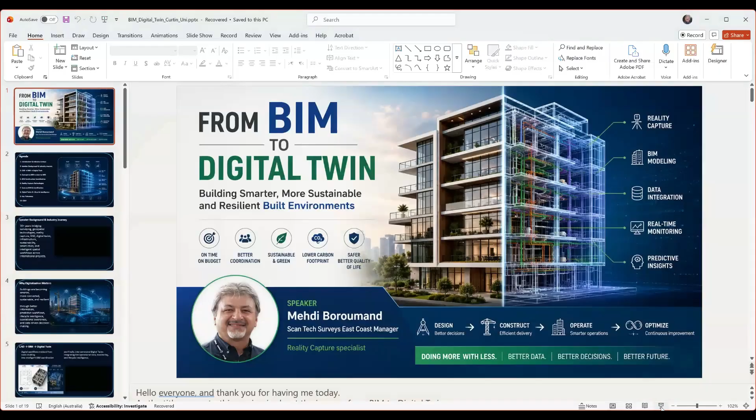Mehdi previously worked with Bentley Systems in digital twin and reality modelling across Australia and New Zealand, and currently leads reality capture initiatives with Scan-Tech Surveys in Melbourne. Today's session will explore how emerging workflows from scan to BIM to immersive virtual tours and digital twins are changing how we capture, interpret, design, and interact with architecture and space itself.

Thank you. Thanks, Alina. Thanks, Amin. Great voice. Thank you for your intro.

Can you hear me okay? Yes, all good, awesome. So yeah, this is really a privilege for me to be here presenting and sharing some of my thoughts around the topic, which is from BIM to digital twin. Thank you for the introduction, and thank you, Amin, for arranging and organizing this.

So I assume that the audience is mostly architects, students in architecture, and also some professors around. This is really a privilege. I need to learn more too - it's a learning curve for me to be in this space with architects sitting around. So I hope it's going to be more of an interactive session rather than a monologue. Feel free to stop me, interrupt me wherever it makes you have questions, and we'll make it more interactive.

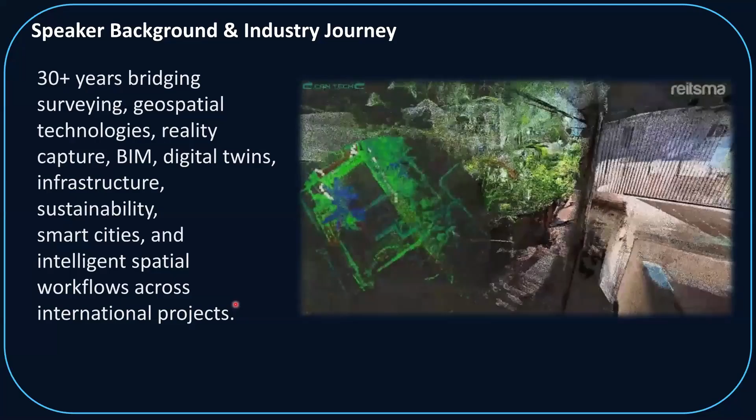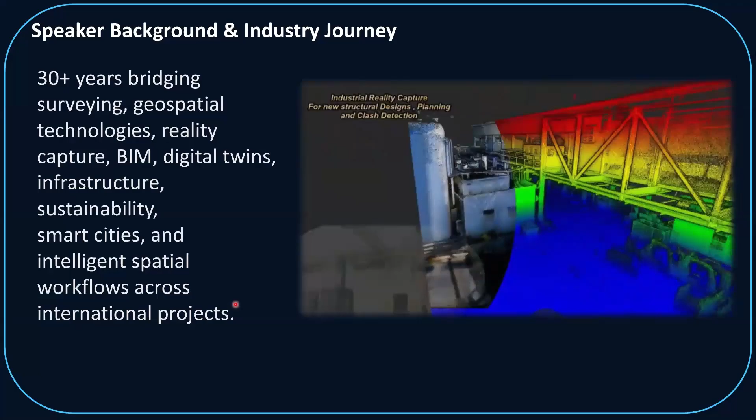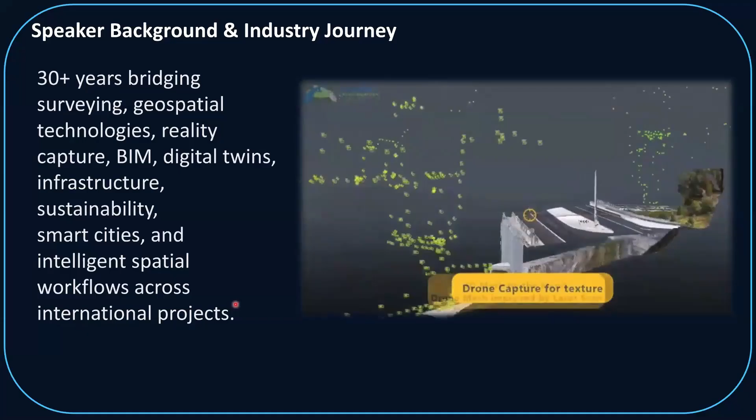So why does digitalization matter? Why is it important? It's not digitalization for the sake of digitalization, we don't do this just to create fancy material. The real value is that buildings and infrastructure are becoming smarter, more connected, more sustainable, more resilient. In the past, many decisions were made based on drawings, assumptions, site visits, very fragmented information, and there was friction in connecting them, so many hassles.

So today, with better digital workflows, we can make decisions. Sorry, let me close this window, a little bit noisy here.

With better digital workflows, we can make decisions based on clear information. So clarity over assumptions is really the value we are looking for. Some measurable reality, better coordination between teams across construction and operation of the live asset, many different teams, how to align them and be in a collaborative environment. This means saving time, reducing cost, improving quality, reducing waste, improving safety, and supporting sustainability. In simple words, digitalization is helping us do more with less. Because of labor shortages, this really makes sense in terms of how we can do more with less resources - less rework, less uncertainty, less wasted material, and better long-term outcomes. It's about how we can increase efficiency around the project lifecycle.

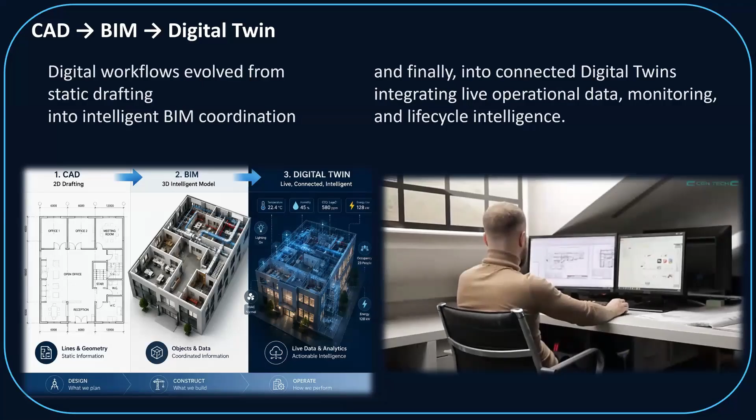A wall was no longer just two lines in a 2D map, it became an intelligent object - material with thickness, even vendor, supplier, all information connected to that specific wall, height, relationship to other elements. This information really started to shape BIM and its value. So BIM is not just 3D geometry that we simply convert from 2D to 3D in the CAD model. A 3D model without information is still just geometry, BIM combines geometry with data. Digital twin takes this one step further as the next tool, actually to live operational data that you need, like how to connect sensors and monitor the system.

And this is really shaping what we call life cycle intelligence, or project intelligence. BIM helps us design and coordinate, while digital twins help us monitor, operate, predict, and improve performance over time.

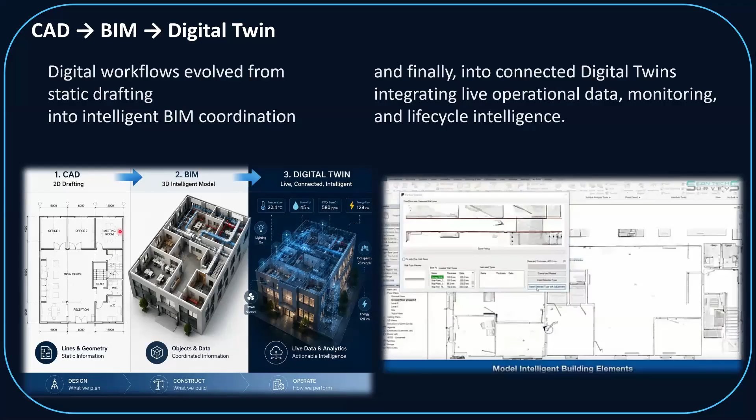Make sense? Yep. This is just a step level from 2D to 3D and BIM, and eventually the digital twin. I'll try to put this in the slides. So basically, we start from two points.

Either we have an existing building and want to do renovation, extend it, add another extension, reshape the facade, change the interior design, or change the use. For those cases, we're considering an existing building, infrastructure, or structure. This is where we need to know what's existing on the ground in reality. What we call an as-built map is really crucial here to have more clarity, rather than having assumptions and then making mistakes not aligned with the existing situation.

Or we start from scratch, from the concept, drafting on paper, sketching, and designing as the first step. So this part is split into the origin of the data that we're providing and feeding the system, and the rest merge together until we end up with the BIM model.

So in those cases, we do not start from imagination. We start from reality, the scan. We scan the building, capture the existing condition, and then create a BIM model based on what is actually there, rather than assuming or just guessing.

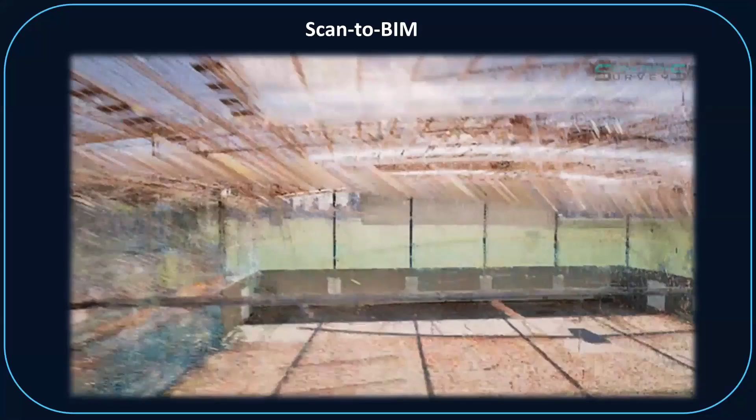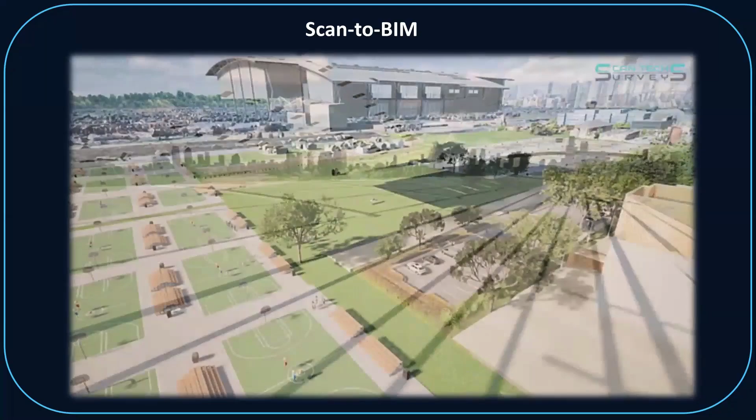Okay, yeah. So from this slide, I try to play some videos, a little bit more visual, pleasing content, because probably before it's getting boring for you, I try to please you more with a little bit of refreshment.

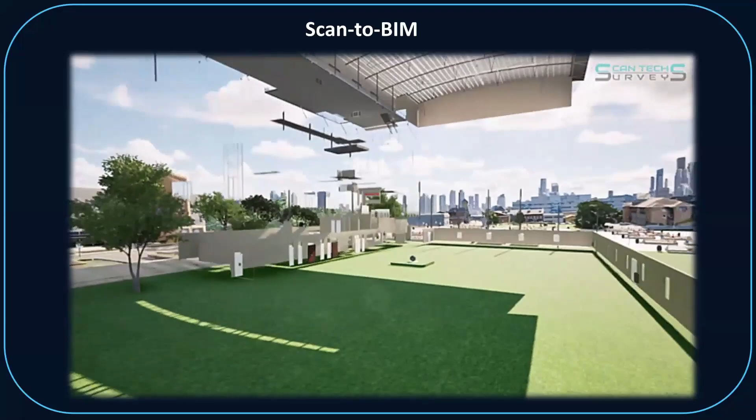So this is how Scan-to-BIM works in practice. This is one of my projects in Perth, where we scanned sports facilities. I put this together in Twin Motion. Perhaps you're already familiar with this Autodesk product, which is for visualization and animation. This is the point cloud I got from different projects.

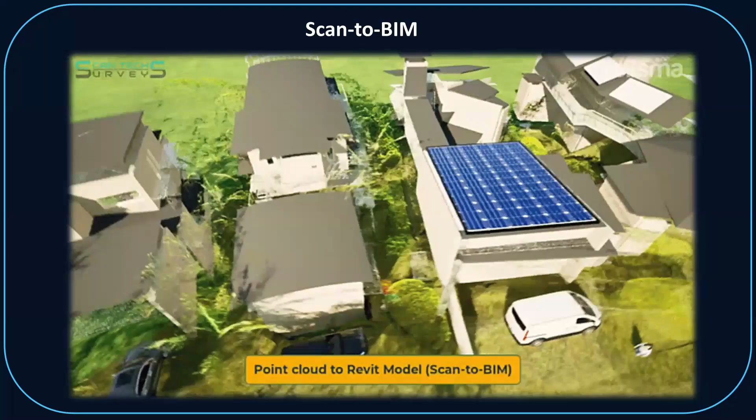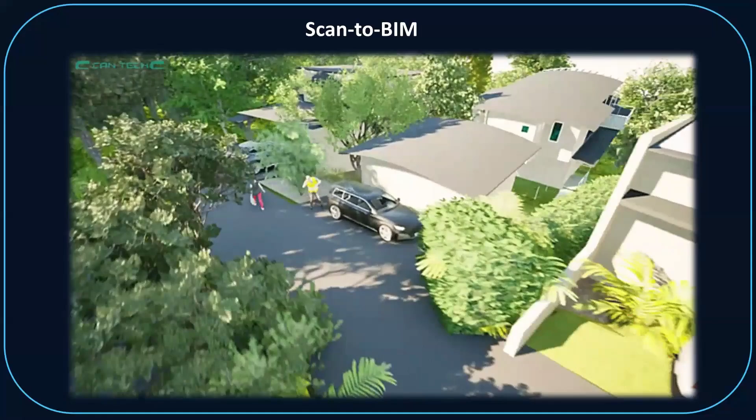How we do the Scan-to-BIM simply means replacing the point cloud with a Revit model, for example. Revit is a product of Autodesk. I've been at Bentley Systems for a couple of years in Australia, where we had Open Buildings for the BIM software, and Lumen RT for animation, to animate the project like this. So similarly, we have Autodesk equivalent and similar products.

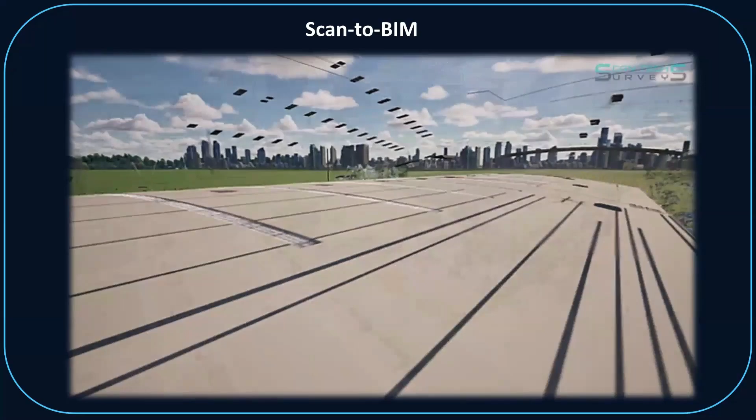Here I use Twin Motion, which is a free software, and this is the explosion feature they just added in the recent update. I used it to break down the elements and put them back together, trying to visualize what it means in terms of the elements, how we put them together, and how we transform the point cloud to a Revit model.

Make sense? Yeah, yeah, absolutely, yeah. So that was, well, long story short, in terms of the Scan-to-BIM.

This is another project. You see me on the field, this is Sunshine Beach in Queensland. The project was an architecture one, and they wanted to renovate, actually knocking down the building and then building up. But they needed full visibility of the environment because it was on a hilly side of the beach, with many villas in very close proximity and vicinity.

So they needed the architects to know exactly the visibility situation. So I started from the drone, and then you see me on the ground with this scanner, with the 360 camera on top. You see me with my phone on my wrist, I have full visibility, I have the real-time point cloud. So on the fly, I'm looking at the gaps, I'm looking at the point clouds, and collecting in real time.

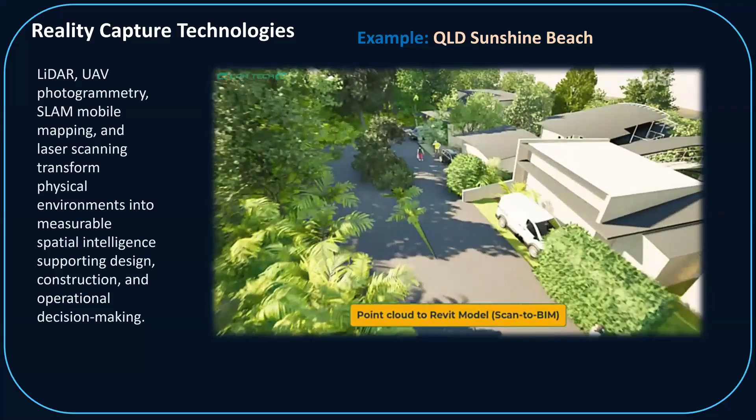So it's capturing indoor space, corridors, rooms, internal geometry. Each technology has its strengths and limitations, I mean the drone and SLAM scanner. The drone cannot see inside, everything can only be seen from above. And the indoor scanner is really a complementary solution, which cannot easily capture the rooftops or above.

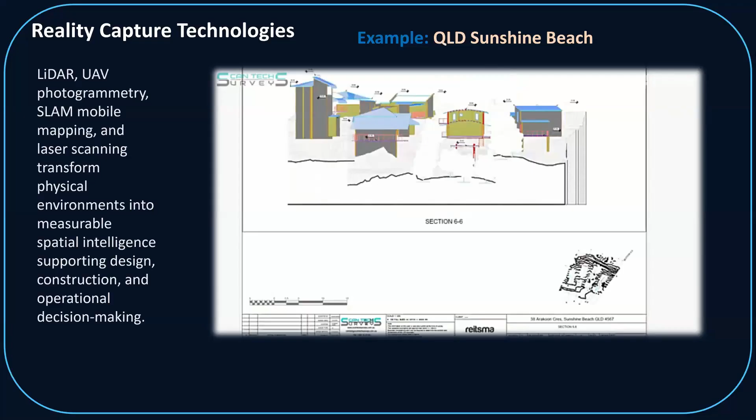So they play together, they co-play. The real value comes from the combination, how we combine them and merge them into a fusion, if you will. This is called sensor fusion. Bringing multiple capture methods together and blending them in a meaningful way, with similar aligned accuracy, creates a more complete understanding of the building for architecture, and this means better existing condition documentation and more confidence before design decisions are even made.

So this is providing full visibility in terms of the environmental, or let's say spatial awareness. I like this term that we use a lot. Spatial awareness is pretty much providing full information of 3D space, but some small element is still missing and lacking, and I will tell you what in the next slide.

So exciting game, right? This is really my passion. Very exciting. I wish that we could do the same thing for our building at Curtin campus.

Probably true, next year we need to get in contact with you and hire you to do some of Curtin buildings as a case study, so we have this in our file and archive for the students. Yes, it looks like you're having all the fun, and we'd like to have some of that fun with the drones and devices. Yeah, exactly, so rather than I tell you how, I provide you fish, I just tell you how to fish. Perhaps makes sense, and yeah, I'm more than happy for both.

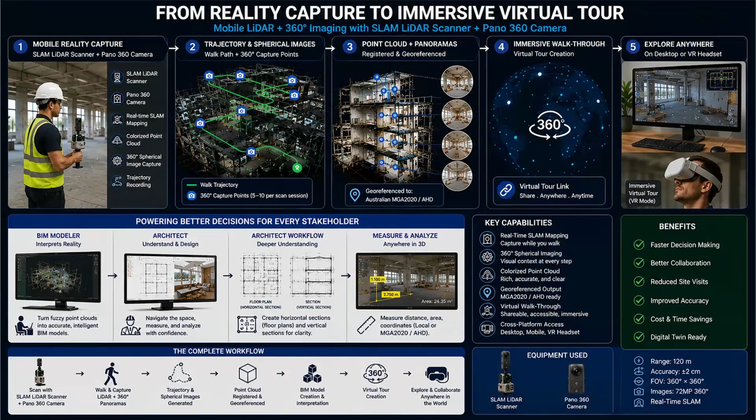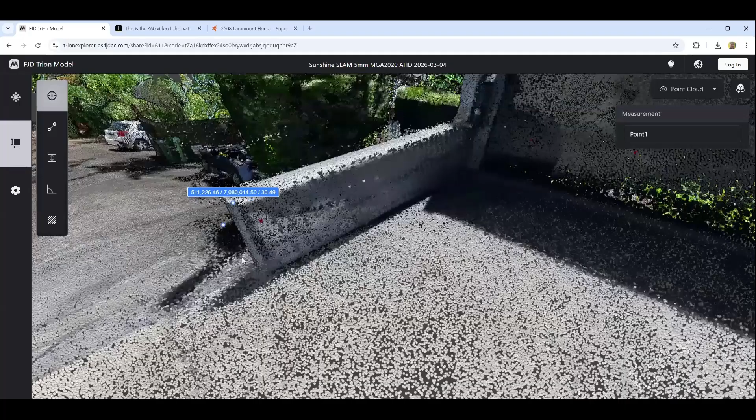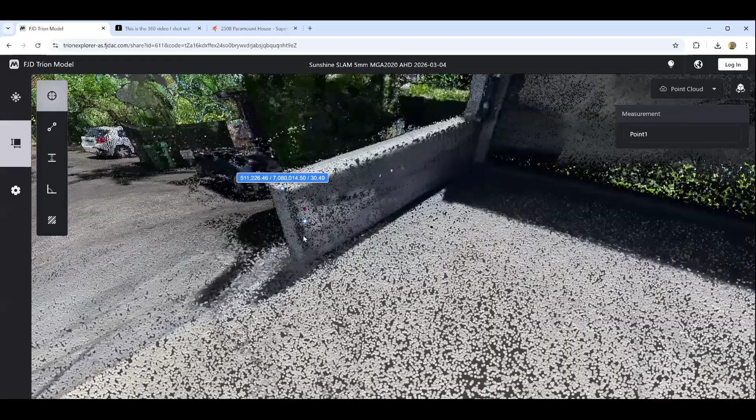So I'm on the point cloud, and something cool - you can even measure things here. If I snap to one of the points, this shows the national coordinates, Australian MGA 2020, for the horizontal reference frame, and the height elevation is AHD, the Australian Height Datum. So no matter where you are in the real world, you're looking at ground truth national coordinates in Australia's local coordinate system.

You can even measure distances. Everything is on the cloud right now - I'm not using any software on my desktop or phone. The heavy lifting is processed on the cloud, so with any device, regardless of processing power, you can easily handle massive data, millions of points, switching between point clouds. For interpretation, if something is unclear, you can switch back to the walkthrough and look at the same spot - we have a box here, a garage here, and everything is measurable in this space too.

Mandy: I've got a couple of questions. Is this what you meant by the tolerance of 20 millimeters, 2 centimeters, as opposed to the 2 millimeter? Is this the measurement you were speaking of earlier? The accuracy measurement - is that related to this?

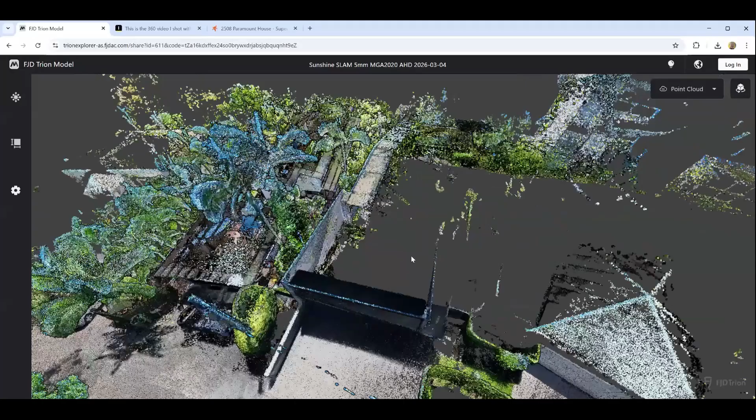Yeah, it's correct for the point cloud only. So when we coordinate some points, for example, I snap on top of this pole, the accuracy I get for this coordinate is around 2 millimeters if I'm using tripod scanners, and it's around 1 to 2 centimeters if I scan this project with the mobile scanning SLAM scanner. That's really clear, thanks for confirming that.

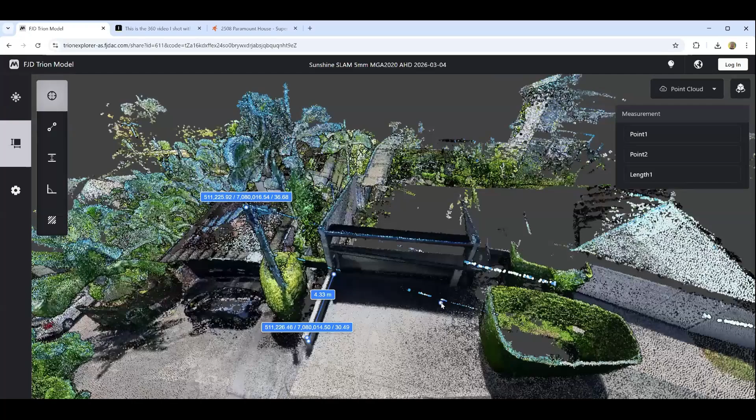My other question was, does this, particularly with the drones, is there a means by which you can also collect the contour data of the site? Exactly, yes. The contour data is simply just a deliverable of the software processing the whole data set. But nowadays the contour lines are not really needed, just a visual presentation in 2D that makes sense. It's not really the base for calculation anymore. For volumetric computation, it's not really required to use the contour line as the base. It's more for a holistic view of the job site, just to have a better understanding of elevation, a representation of the third dimension in 2D maps.

Yeah, it's absolutely superb for someone who goes to site and takes out a tape measure and measures everything. I think it's a superb way forward.

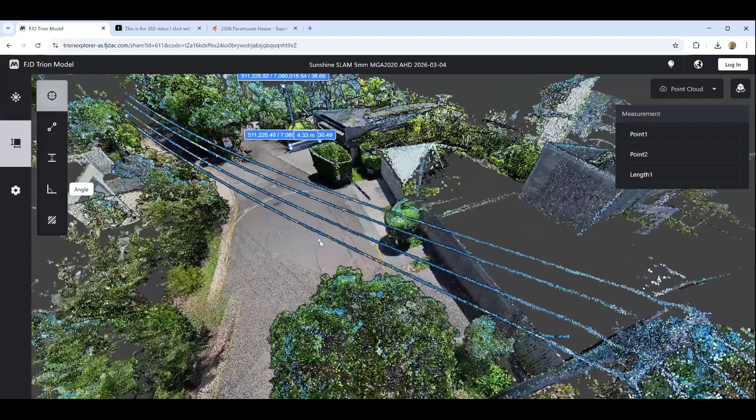Exactly, you can even measure the wires here on the transmission line crossing. If you just want to design something and it matters, you need to know the height of these wires crossing this street. So 6.79 meters is the height of this wire.

So looping back to the visual, this walkthrough is not meant to be the base for super accurate measurements, but it provides you full visibility in terms of interpretation. Even if you have the possibility of measuring things here, if you really need the highest possible accuracy, you need to use the point cloud, because you can snap better. This is a more accurate base for measurements. Make sense? Yes, perfect.

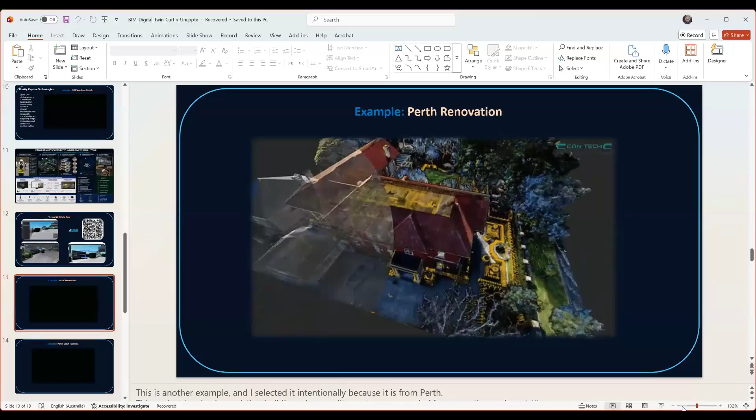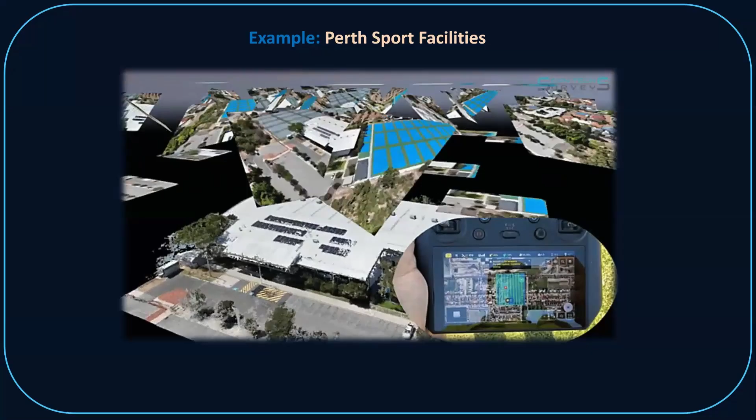So this is another project in Perth. These are the gadgets, as I said. Again, flying the drones over the asset - I'll try to make it a little quicker to catch up on time.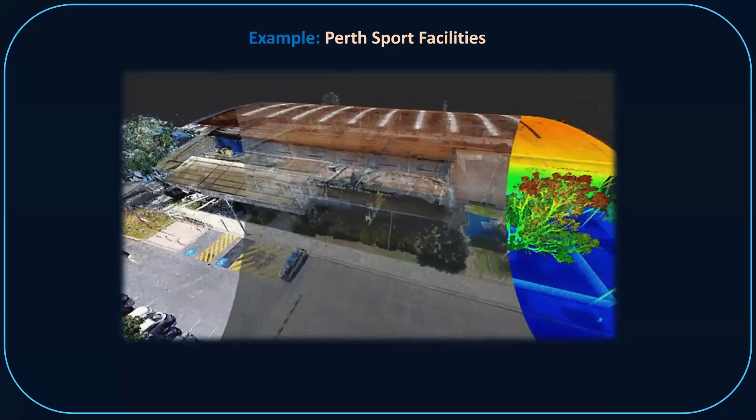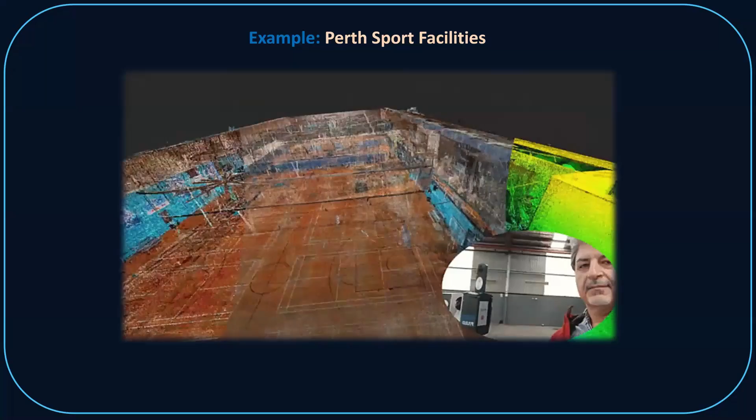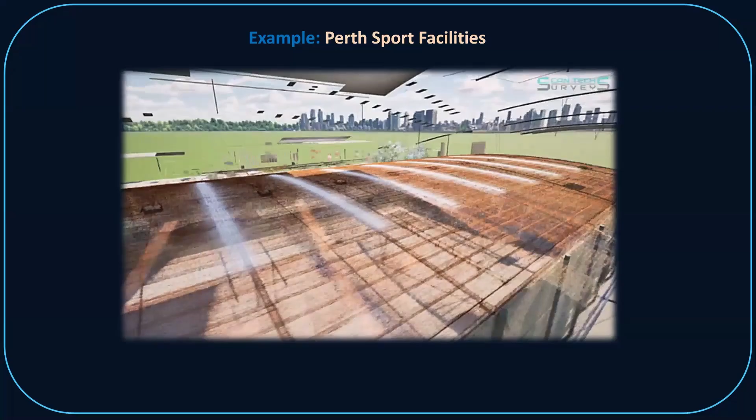This is the tripod scanner, because we needed 2 millimeter accuracy for the renovation of this space, ending up with this point cloud of the site. This is the animated section providing more visibility in the point cloud, which looks fuzzy. This is the virtual tour we get from the panoramic camera on top. So sometimes tripod laser scan is needed because the project requires higher accuracy - this is why fit for purpose is very important.

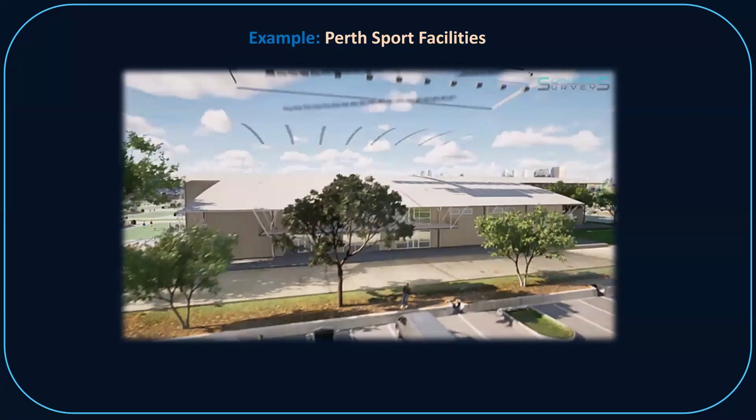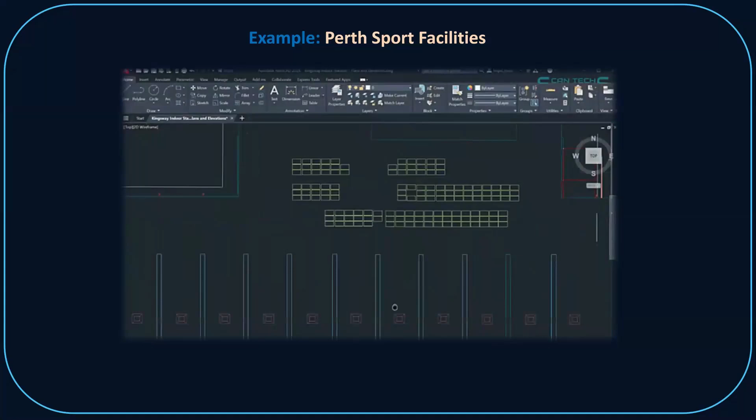Reality capture is not just about buying a scanner or using a scanner, the method depends on the project need, accuracy, time, access, budget, risk, and deliverables. So in this case we capture the data supporting the modeling and renovation, planning, interior design, understanding the full picture, and also helping the decision maker.

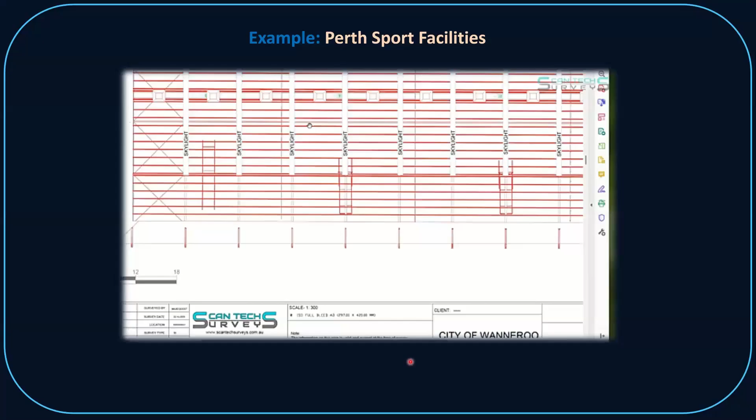And these two sections, as you can see, are extracted from the 3D model, not the other way around. Some people start from 2D and then try to make it 3D, which creates a little friction, but it's more hassle-free if we do it the other way around, extracting the 2D sections from the 3D.

Just remember that this is a different, newly developed technology named 3D Gaussian Splatting, or 3DGS in short, a new technology based on AI.

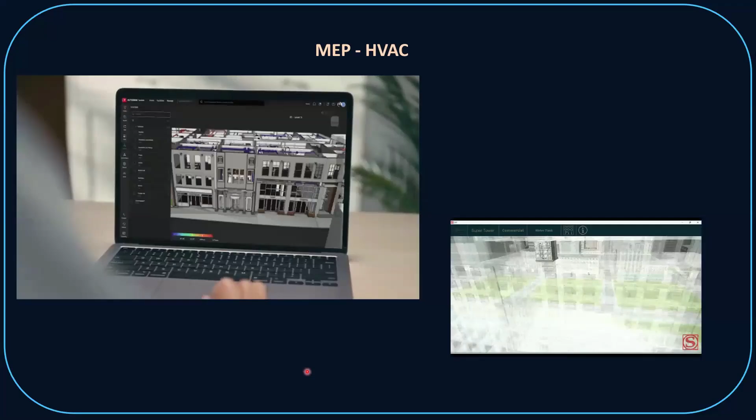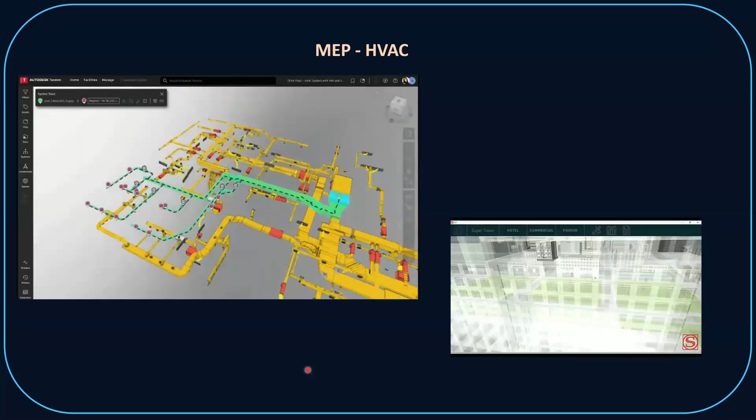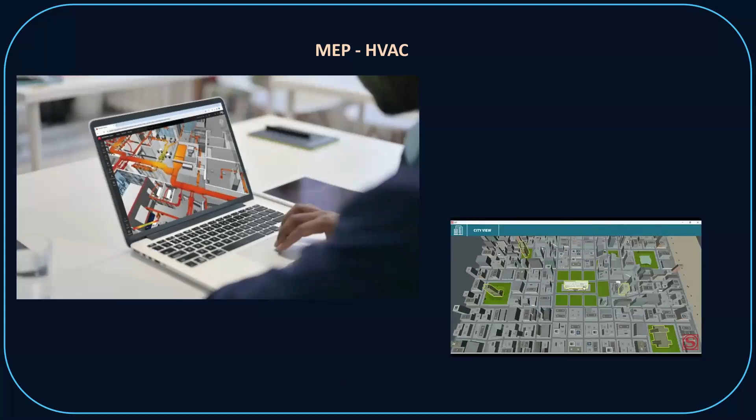In terms of the next level, it brings us to the MEP side of BIM, the mechanical, electrical, and plumbing, piping, and HVAC systems, the heating, ventilation, and air conditioning part. This really needs to be added, either by putting together a BIM model or by scan, because we need all elements of a building or structure to end up with a complete digital twin. Otherwise, something big is missing in the operation and simulation of the whole project. This is the most complex aspect of the project, the MEP and HVAC, which is the proficiency of Amin, and he has more to present.

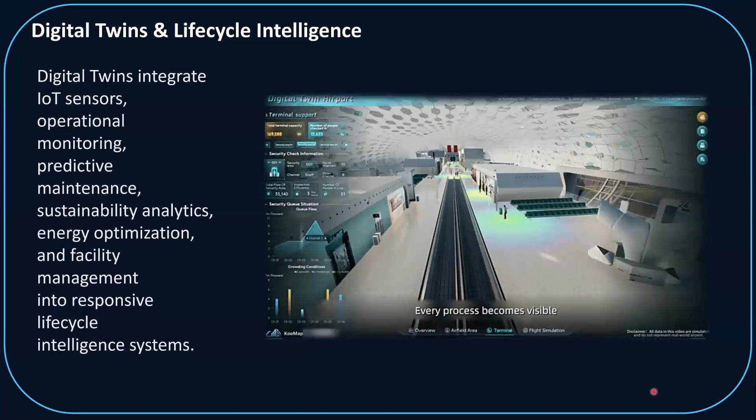This brings us to the idea of digital twin, and I'd like to demystify and correct a misconception here. Some people believe a digital twin is just a geometry or BIM model, but it's more than that. A digital twin is a replica of a project, replicating the situation in real time and monitoring the enlivened model and live data. Rather than just having a reality capture or BIM model, we are looking at a living creature, which needs IoT sensors in place, temperature, environmental, pressure, whatever makes sense depending on the asset and its operation. For example, for HVAC systems, for temperature and pressure, you need gauges on the asset.

Then we scale up to the city level. This was the presentation I had last year in Spain for the Smart City Expo conference, on how we can create a digital twin at scale, at the city level, and how we can do smarter management. Rather than just doing disaster management, even if we have fast response to disaster management, we are more in a predictive environment where we can predict disasters and avoid them, which is less costly, mitigates risk, and improves safety.

So we are looking at the dashboard right now for city management, where all of those IoT sensors, occupancy of parkings, temperature, water level, any sensors in the city, traffic sensors, provide live data coming in and projected on your dashboard. You're looking at the whole city, you see a heat map which identifies hotspots where you have problems, for sending emergency forces or any other situation, even forecasting.

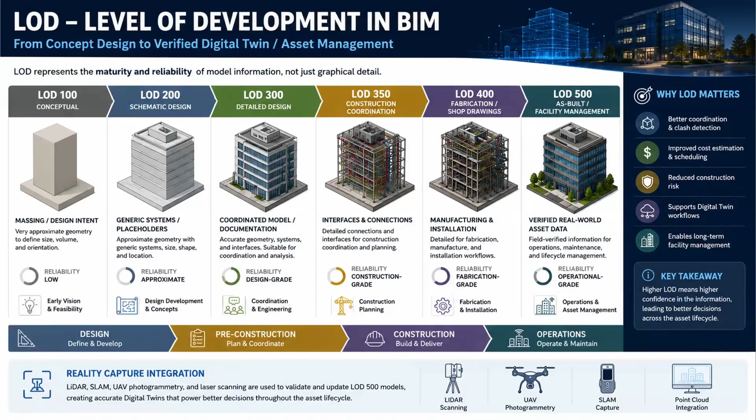Anybody else have questions? Let's see if any of the students have other questions. I'll start quickly with my first one.

In terms of software that students could use, especially for a page like this one, thank you Maddie for sharing that. If everybody had a takeaway page like this with enough image, text, and good references, it would be perfect for our unit and assessment. Is there any software or AI you suggest students learn apart from architecture software, like Revit, that helps them plan or show different systems in their architectural drawing more accurately? If they use AI, usually they assume something and go with it, which could be wrong or correct. What is the best software or AI that is more accurate?

In terms of accuracy, we as surveyors are very obsessed about accuracy. We have a saying from a Russian politician: trust is good, but control is better. That means nothing is acceptable without verification. In our surveying world, we have to verify everything. We assume everything could go wrong and we double check. We always need a plan B, but in terms of the deliverable and accuracy, there will be no plan B, it has to be 100% verified accuracy. We cannot take any risk there. Back to your question about AI, I've never heard of software that can reference very accurately without hallucination or fabrication. They all fabricate and hallucinate at some level, even with geometry. I've heard that the recent update of Revit leverages a lot of AI, but I don't know much beyond that. I'm mindful about leveraging that technology for design and dimensions. It's good to please people and create impressive visuals, but when it comes to drawings, I'm very conservative around that.

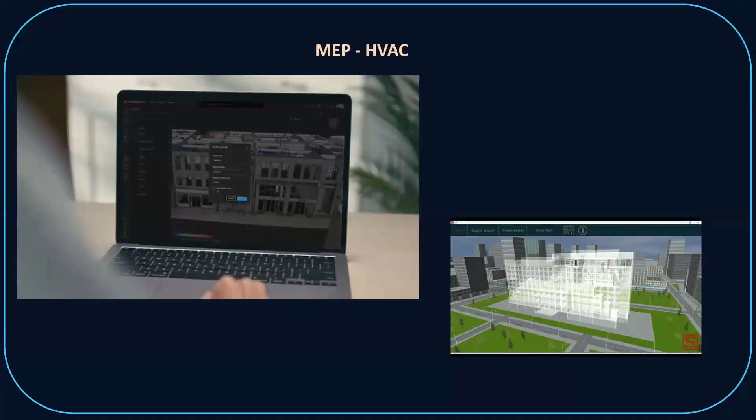Some of our students are doing their section on smart and real-time technology. My question is regarding sensors, where they should be placed within the building, preferably inside and outside, though outside might be a different system. Where would the actual management system be located for collating data from sensors? For instance, better near switchboards, in a plant room and switch situation, or more accessible via the office spaces. Where do you recommend sensors be located, and where should the management system be located?

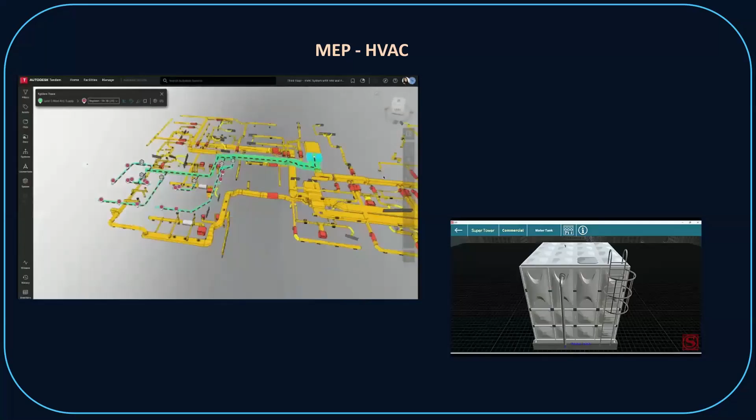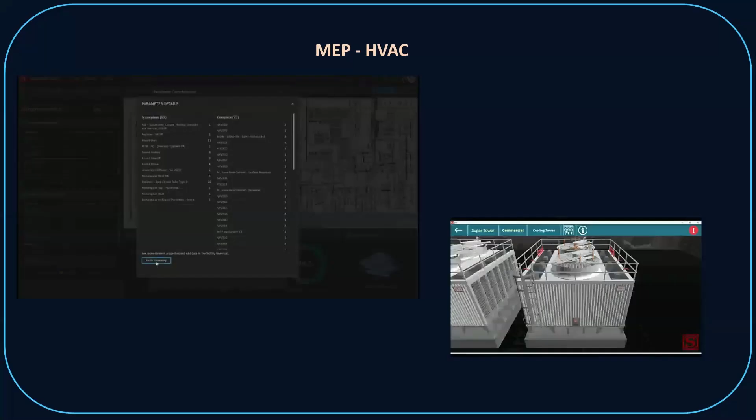Well, excellent questions, thank you. In terms of facility management and what we're looking for as a catch in the digital twin, this is meant to provide you full visibility, a holistic view generally speaking. And when you break it down to best practices of where to put sensors, it really depends on where it makes sense.

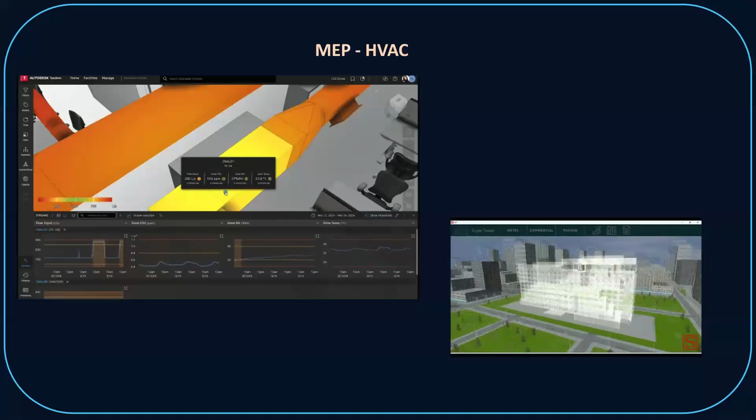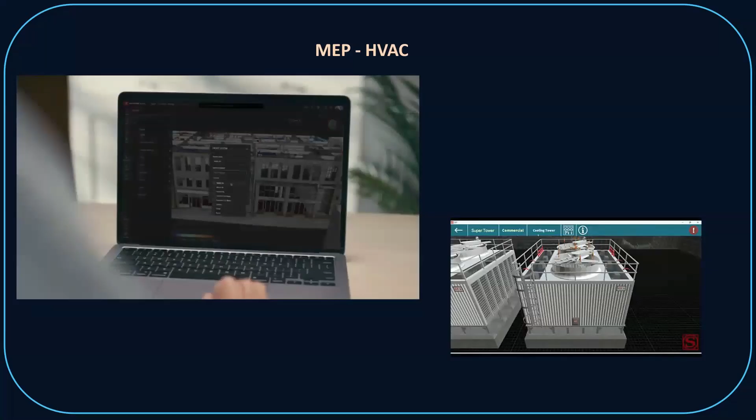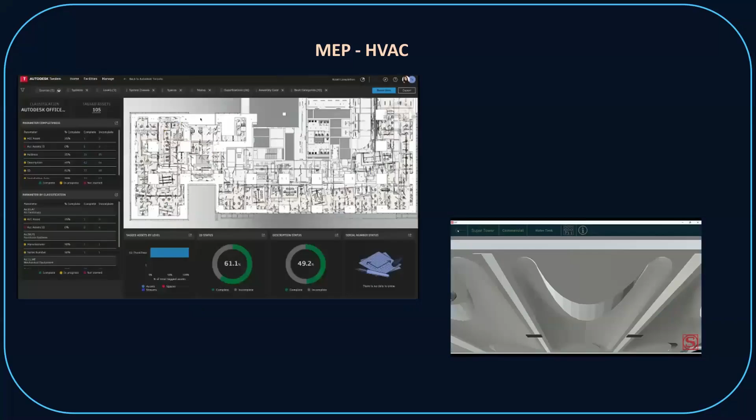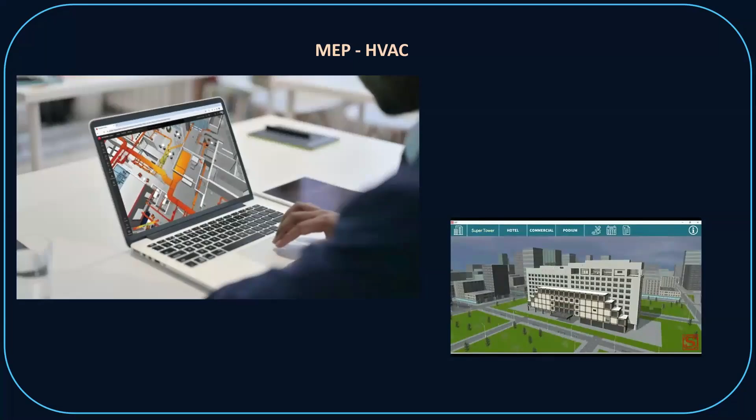For example, with the HVAC system, depending on the asset, building management needs full real-time visibility, even without human intervention, even if the operator isn't at work. It has to be 24/7 monitoring, connected to an early warning system, like the fire system in our building, with smoke sensors in the rooms. In my apartment, we have smoke sensors that are super sensitive to any smoke as a sign of hazard, could be fire or overheating. That sensor sends a message to the central system and activates the warning or evacuation alarm, all without human intervention.

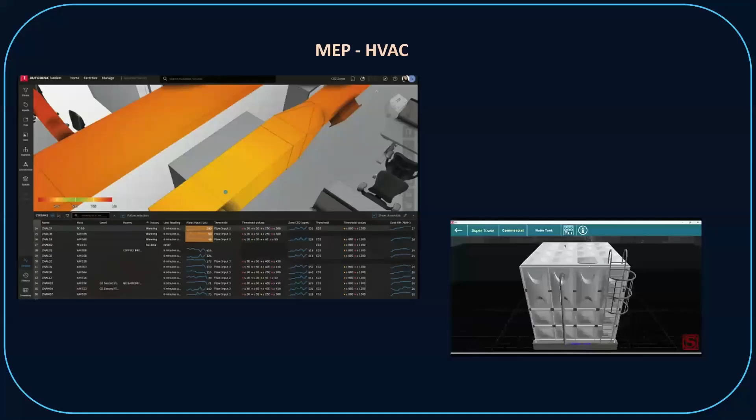What I'm saying is it has to be on autopilot, on autonomy, all systems working together in a smart way, even with or without a human monitoring hundreds of monitors looking at different assets, HVAC, rooms, corridors, air conditioning, cooling systems. So it has to be automated.

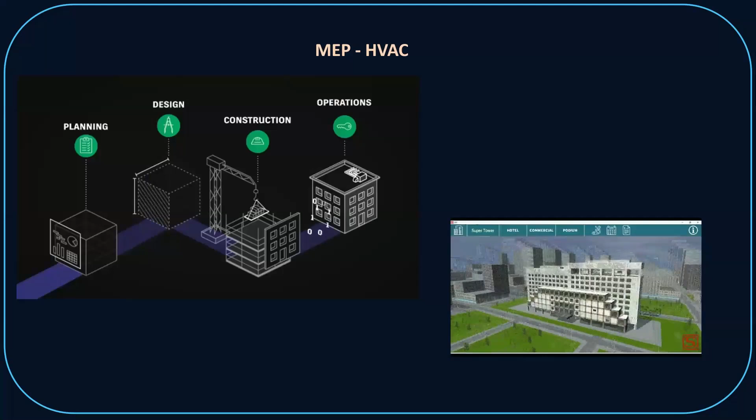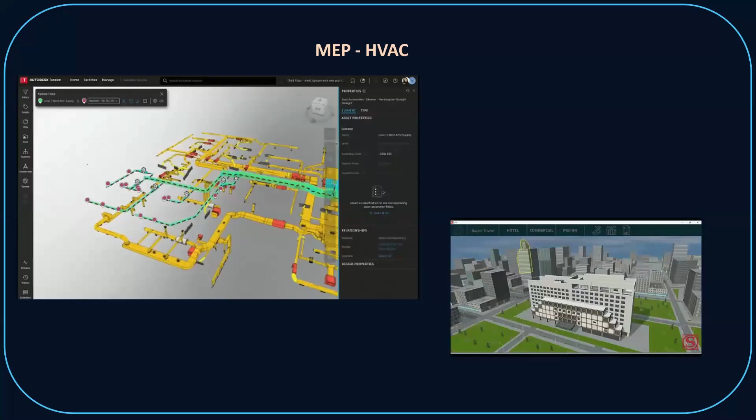In terms of which sensor goes where, it really depends on the asset we're talking about. For example, it makes sense to put pressure, water level, or temperature sensors depending on the case. Maybe Amin can help provide more.

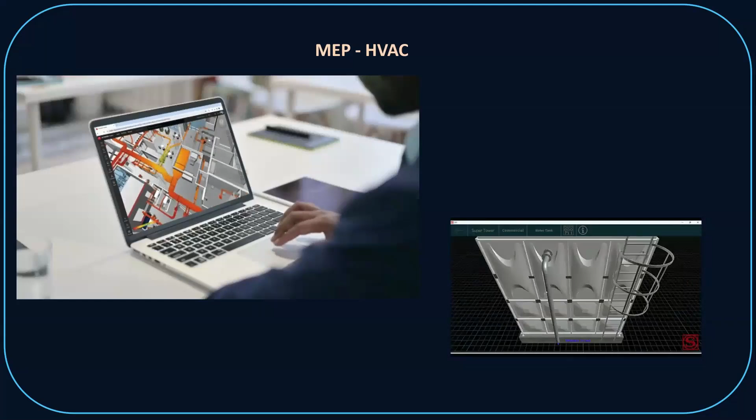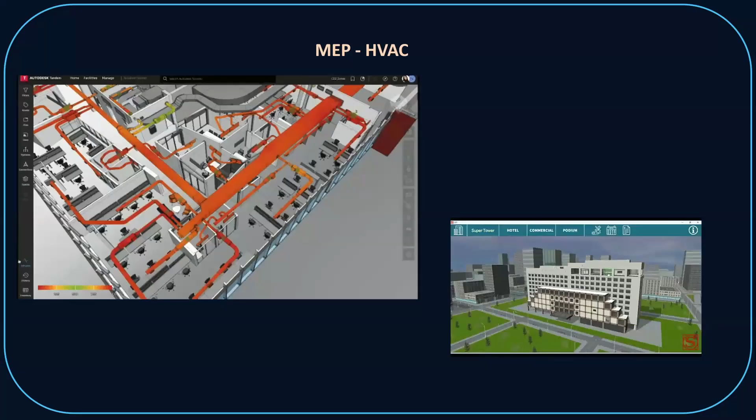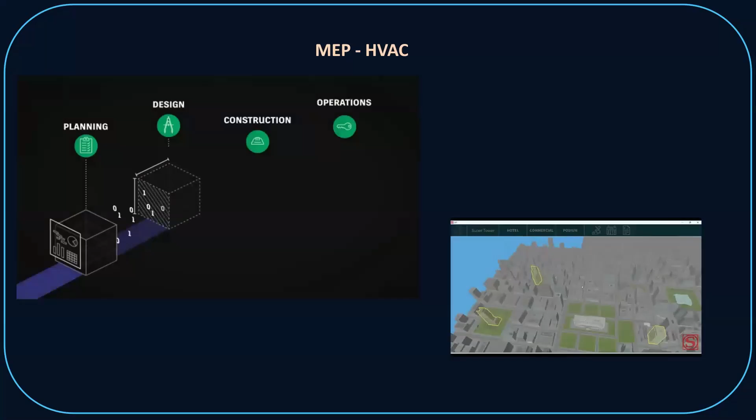Yeah, it definitely depends on the type of building and the access. The first important thing to notice is the access point. If it's a high-rise tower, most of the time there could be access points on every few floors, and the main central point is somewhere in the basement or ground floor, or at the top, which you need for emergency access.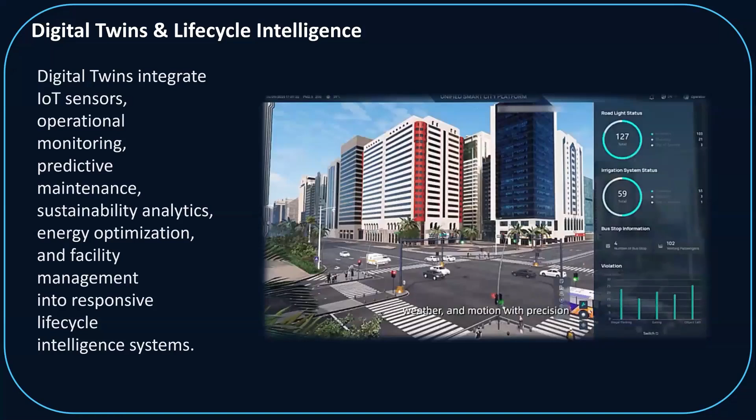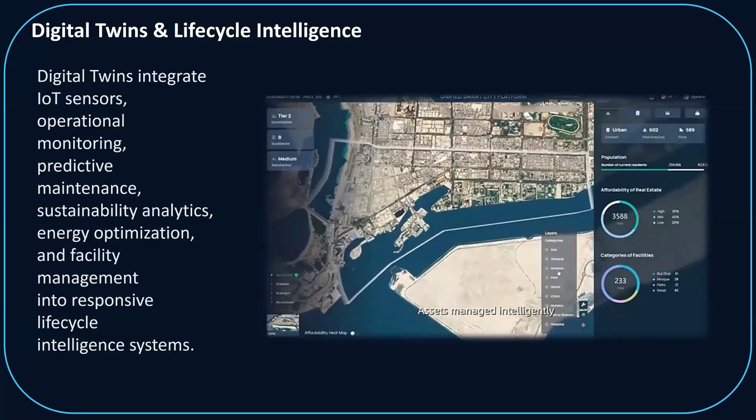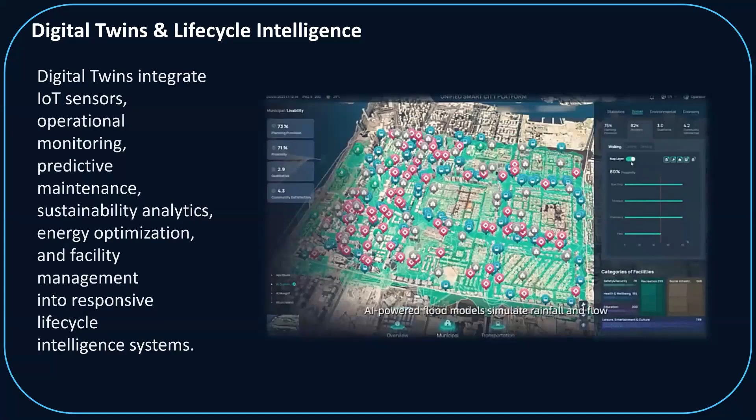So most of it goes back to the emergency control systems. If something happens in terms of fire or any hazard, it has to be accessible and very safe and secure. In some buildings we have multiple plant rooms based on function, especially in high-rise and commercial buildings, where we're talking about multiple plant rooms, but there's one central plant room or control system in the most accessible place.

And as I said, it's completely different from building to building, hospitals, offices, educational buildings, and the design of the building. If it's very wide, or has an H shape, or a linear plan, the plant room should be somewhere that makes sense in terms of accessibility. That's the most important thing I can say from my understanding and what I've seen through projects.

But this is the architect's job to design that room. In designing it, you have to talk to different engineers, mechanical, electrical, and they might have different suggestions or things you're not aware of as an architect. They might say they need more space for this room, or a separate room maybe outside the building. So that's where you need to collaborate with different engineers on design, but ultimately that decision comes down to the design and the architect.

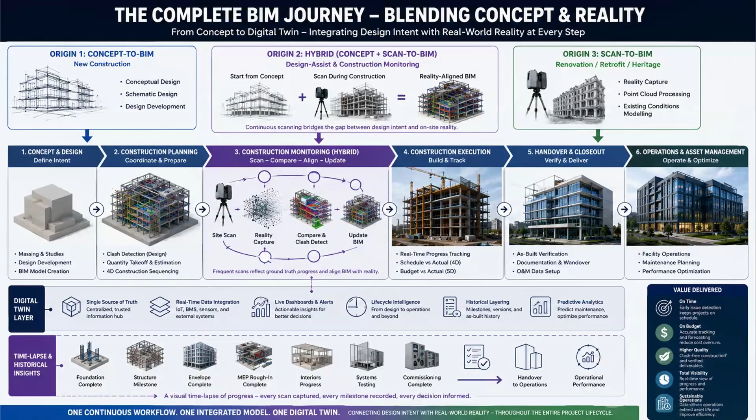I really like the example of the fire sensor, because that's absolutely right. It's put up high because the heat and smoke will rise—smoke detectors and heat detectors are different, but they're always on the ceiling, so they're immediately able to capture that information and send it through. So any of you working on sensors, just have a think about fire and heat sensors.

I have one more quick question. Since all of this real-time capturing is happening above ground, I was wondering how close we are to using the likes of GPR, ground penetrating radar systems, to look at what's happening below ground—so we can maybe predict shifts in things like the level of compaction, if that's becoming compromised under a building, or changes in aquifers or movement in water. Is there a way of using available technology like GPR to document what's happening below ground as well? I know at the moment GPR is more of a location system, but I'm wondering how much real-time capability there will be, because I think that would be great.

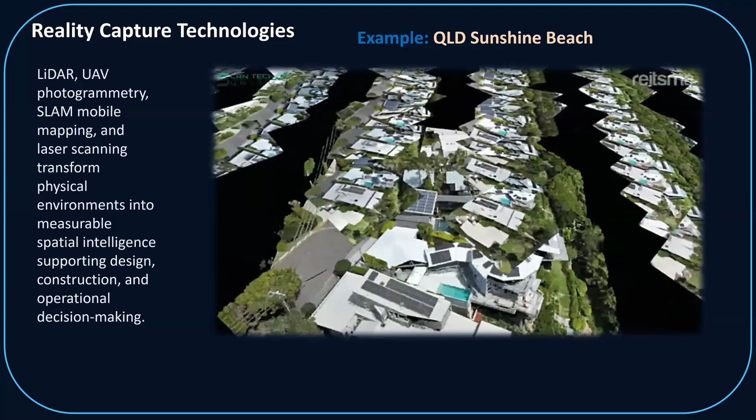So in this project, we are looking at a $5 million property—very average, even below average, in Sunshine Beach for expected property value. The service we provided there was a modern service. They assumed this is the highest technology in place to provide them super accurate, full visibility of their project, which was correct.

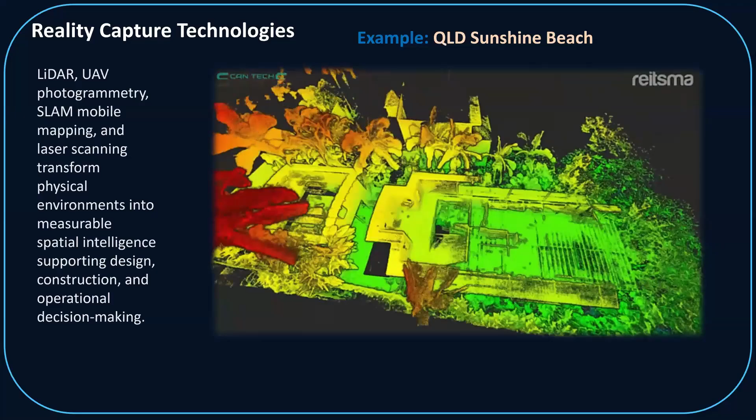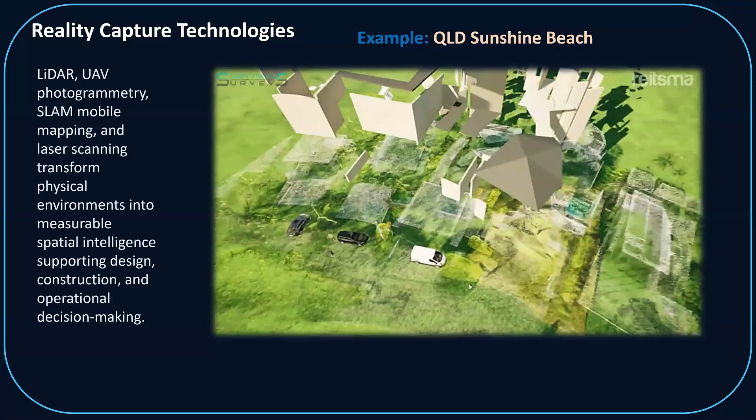They just needed some sections and some 3D. They also needed the IFC model. So we created the Revit model, and then we converted it to an IFC model, which was more standard across the industry, because they wanted to use ArchiCAD.

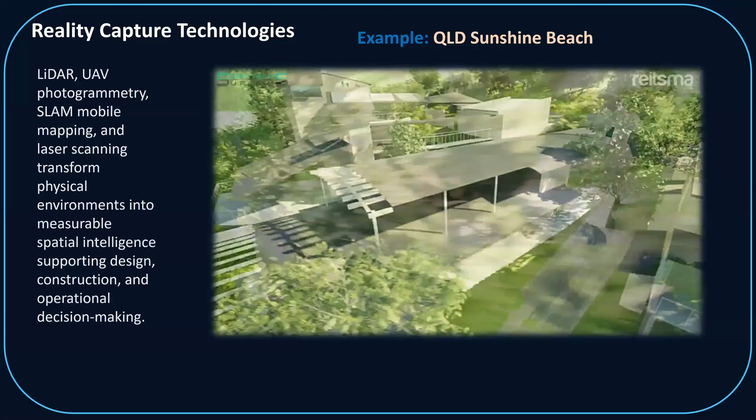I did a little bit of research and realized that ArchiCAD could not ingest the Revit model. So I exported an IFC model for ArchiCAD to be able to process it, and also provided some sections like this, as you can see.

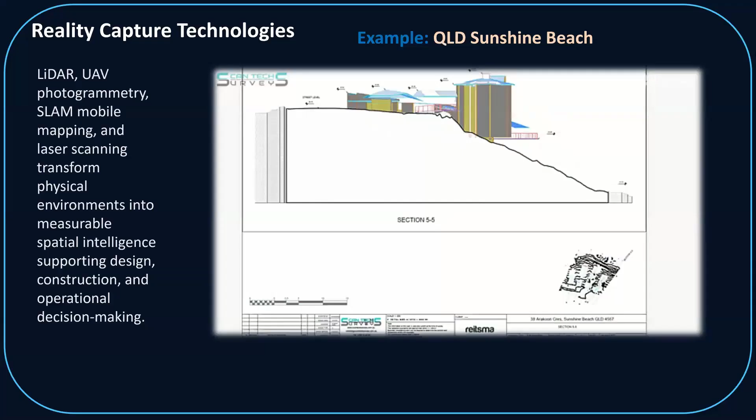The whole fee was like, for us, it took 1 day operation, less than a day on the field, and a couple of days, a little bit more, 3 days, because the Revit model was a little bit time consuming. It was a manual job to do.

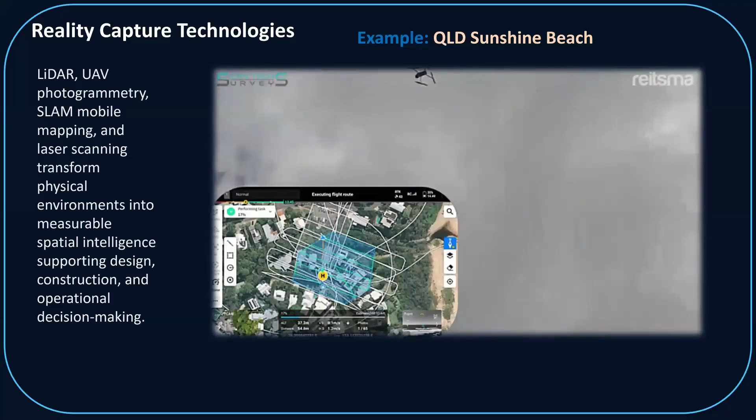It was totally 7-8K, 7-8,000 Aussie. So they would rather pay a fee like that to get the information they want in terms of accuracy of the project, and whatever is available, and then probably for the future design or the changes they want to apply to the project.

Of course, if I do not provide biased information, in terms of the best of the class, we had more customers when they heard about even a few thousand dollars, they decided to do tape measure instead, because they didn't see the value, or we couldn't do the value proposition properly, or it was just not worth it for them, even for multi-million-dollar properties.

That was a little bit of an issue. We decided to do this better in terms of value, to highlight the values. So one thing that I can see here is the time, because if you want to pick all this information and put it into Revit or any software, it takes probably a couple of days, and there would be errors, because I've done this multiple times.

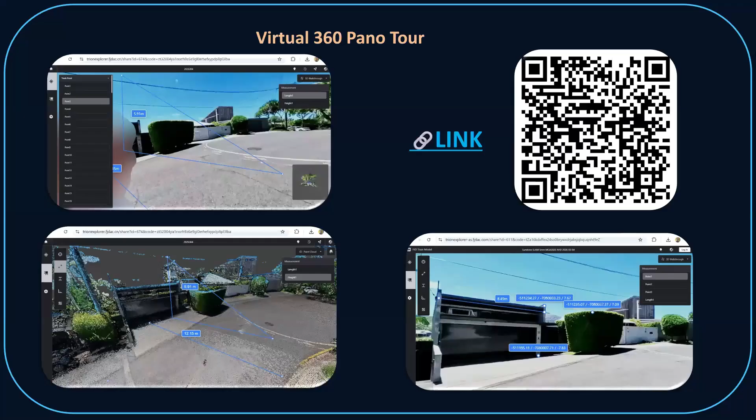Especially in renovation projects, sometimes if you do one mistake, that mistake costs you a lot of money and a lot of time. Within 3 or 4 days, you can get everything done to the Revit model from what you picked on site. That would be, I think, the best part of it. That is the return on investment, I think, for that one.

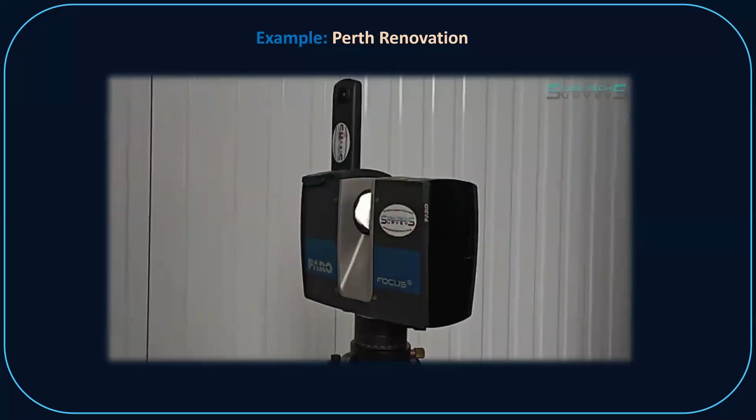It is accuracy and time saving, in terms of the time saving and also improving the accuracy, and eliminating the possibility of rework and mistakes, which is even more costly. Sometimes we do not understand why they do not see, because the return on investment is much higher than the investment they're doing in this type of reality capture.

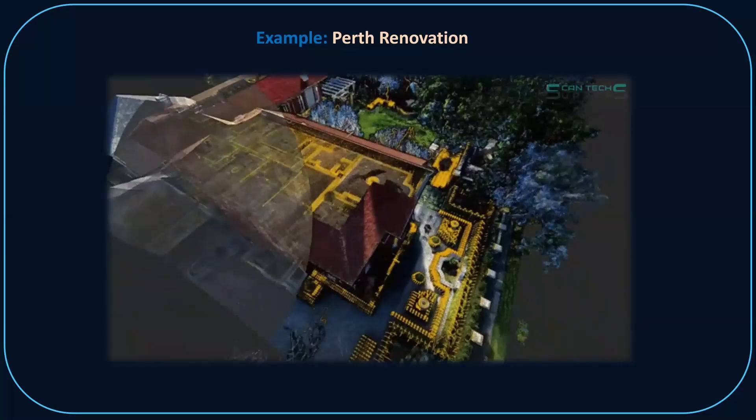But this is the work that happens.

Well, it was a very good presentation, amazing presentation, Mehdi. We are at the beginning, as I said, of our collaboration, and also this is the beginning of this kind of technologies. But this is something that students need to know more about and need to apply to their work. This is the new world, new era.

Everyone needs to be updated all the time. Doesn't matter for me myself, experience is one thing, but now you have to be on track, because it's like a river, you have to go with the flow. You can't stop at any time, because you would be behind everything. So I need to update my knowledge, you need to update your knowledge, everybody needs to update. This is an endless story, the learning curve is really endless.